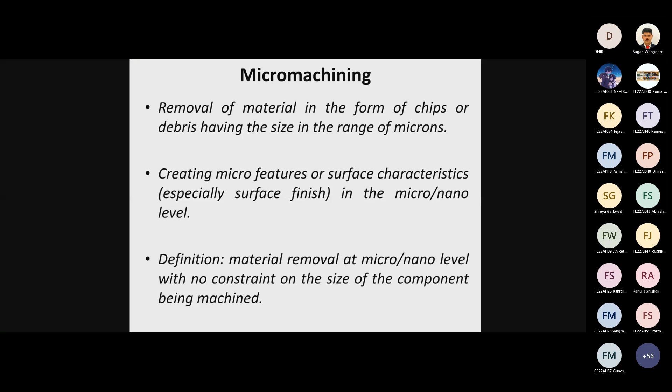Now here you can see what micro machining is: removal of material in the form of chips or debris having size in the range of microns. Whatever chips or material we are removing, its size ranges from 10 microns to 999 microns. That is nothing but micro machining.

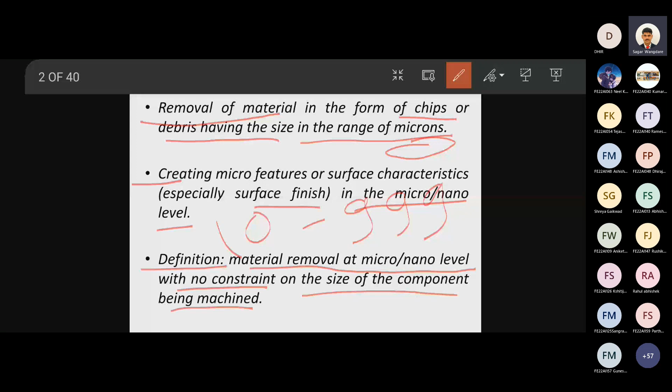Now, creating micro features or surface characteristics, especially surface finish at the micro or nano level, for this micro machining is useful. The definition is: material removal at micro or nano level with no constraint on the size of the component being machined. That is nothing but your micro machining.

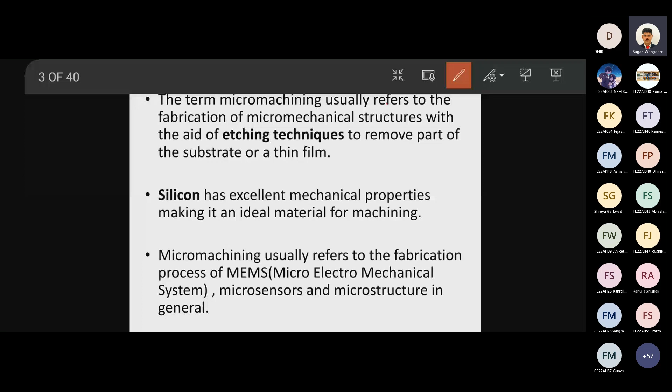The term micro machining usually refers to the fabrication of micromechanical structures with the aid of etching technique. Etching means removing in small particles, that is nothing but your etching.

Etching is used to remove part of the substrate or a thin film. The technique used in micro machining is etching, which means removing the material in small quantities.

Then next point is silicon. Silicon has excellent mechanical properties, making it the ideal material for machining. Because of silicon's material properties, it is used most of the time in micro machining.

Micro machining usually refers to the fabrication process of MEMS, micro electromechanical systems. This micro machining is required for small electronic parts. But machining is a mechanical process, so this mechanical process we use in small electronic parts, that's why it is termed MEMS, micro electromechanical systems.

In that, we have micro sensors and microstructures in general. You might have heard terms like microcontroller and all this, these are also manufactured with the help of micro machining.

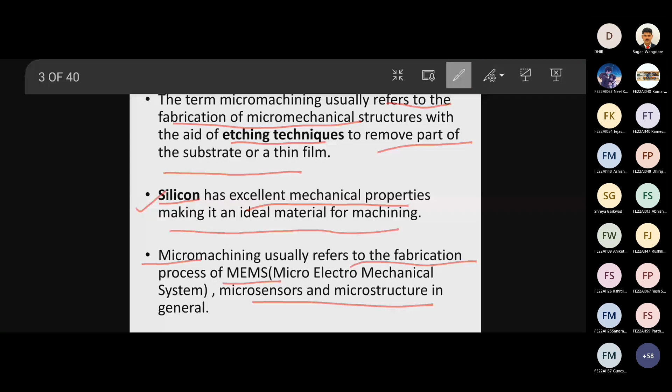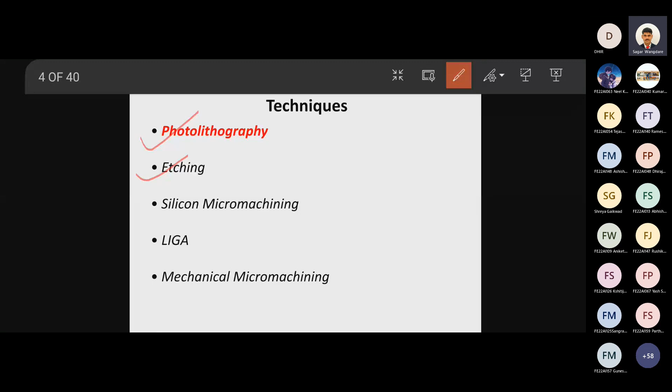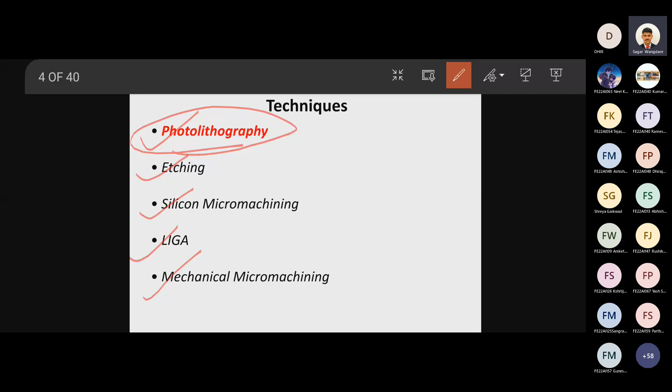Now, these are the different techniques by which we can do micro machining. First is photolithography, photo means light, in this we use light. Etching means removing in small parts. Silicon micro machining, LIGA, mechanical micro machining, these are the various types, out of which we will see the first one and another one, etching.

Here you can see photolithography, this is one type of micro machining. Photo means light, right? Now, how do we use light to remove the material? You can see here, this is your light source.

That light source is allowed to pass through this condenser lens. In this condenser lens, whatever light is coming from the source, that is scattered. Now, because of this condenser lens or glass lens, your light will convert into a straight line.

When your light passes through this mask or reticle, and then whatever light comes out from this reticle, when it passes through the projection lens, your light gets concentrated, right? So here it is concentrated at the foci, which is a little above the surface.

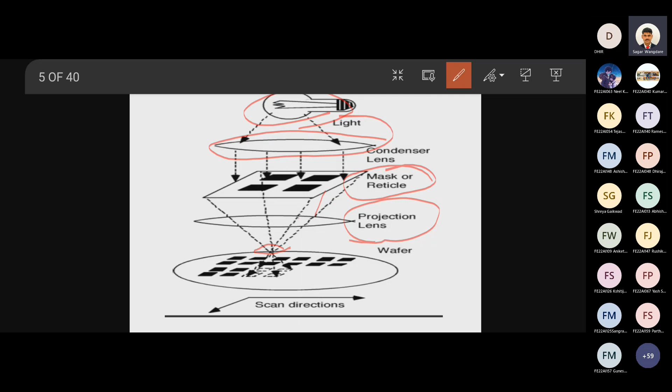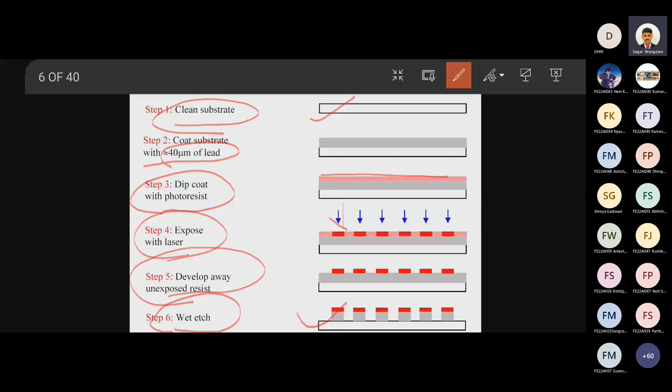Now, photolithography description, you can see here. The wafers are chemically cleaned to remove particulate matter, organic, ionic, and metallic impurities. High-speed centrifugal whirling of silicon wafers, known as spin coating, produces a thin uniform layer of photoresist, a light-sensitive polymer.

on the wafers. Photoresist is exposed to a set of light through a mask, often made of quartz. Wavelength of light ranges from 300 to 500 nanometer for UV rays, and X-ray wavelength is 4 to 50 angstroms. 1 angstrom means 10 raised to minus 10 meter.

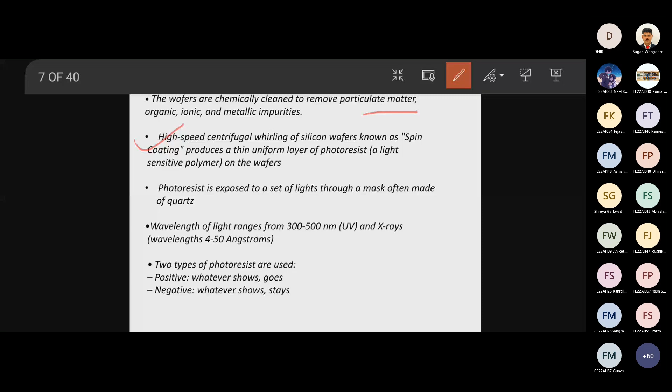Angstrom is the unit of length of the wavelength of the light.

Two types of photoresist are used: positive, where whatever shows goes away, and negative, where whatever shows stays.

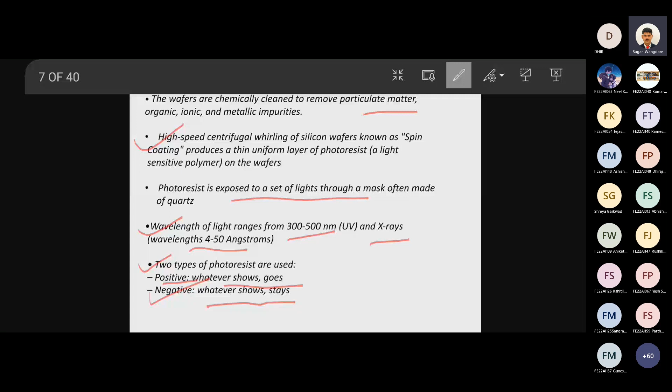You can see here the same thing, negative photoresist and positive photoresist. In negative photoresist, whatever is showing will stay, and in positive, whatever shows will go. And at the last, we get the etched patterns.

Now the next micro machining process is abrasive jet machining. What is abrasive? Abrasive is nothing but small, very hard particles. Now what we do with these hard particles is mix them with air, and force that air to pass through a very small nozzle.

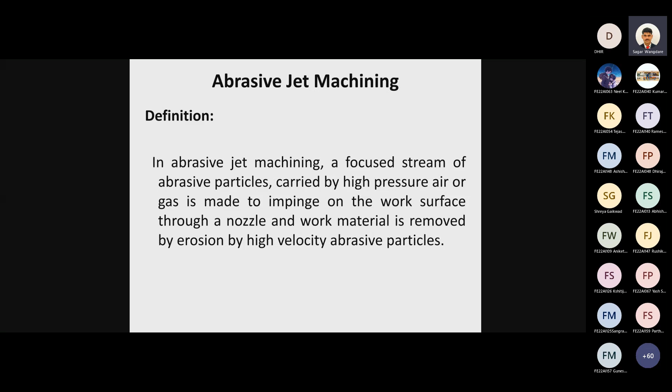When these small abrasives pass through with this air, because of the air pressure, these abrasives also flow with very high speed. When these abrasives fall on any workpiece, they remove material from it. In abrasive jet machining, a focused stream of abrasive particles carried by high pressure air or gas is made to impinge, meaning fall, on the work surface through a nozzle, and work material is removed by erosion due to the high velocity of abrasive particles.

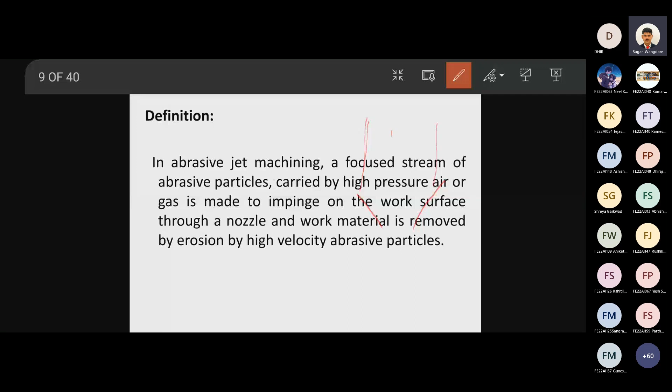Now suppose this is your nozzle. Through this nozzle, high velocity air is flowing, and along with it there are some abrasives. These abrasives are allowed to fall on this workpiece. When these abrasives fall on the workpiece, because of their high velocity, material will be removed from the workpiece. That is how abrasive jet machining works.

Then another method is also there, electron discharge machining. In electron discharge machining, what we do is force electrons to fall through a small nozzle onto the workpiece. The size of an electron is very, very small, right? So because of the fall of electrons at very high speed, it will take a small hole, or material will be removed at a small scale. There are some holes which are in the nanometer or micrometer range, so such holes can be made with the help of micro machining.

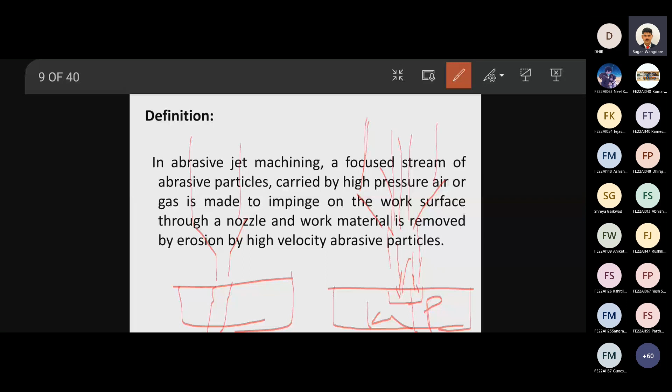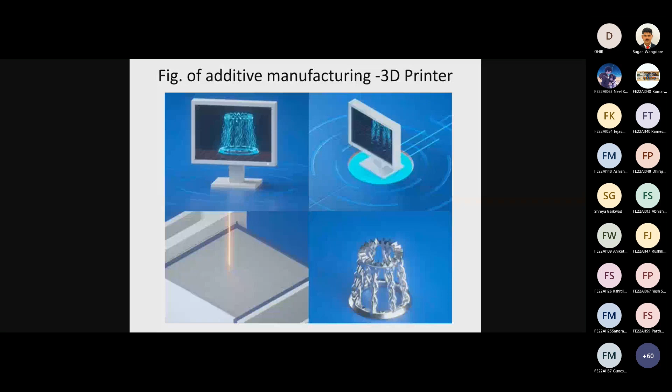Additive manufacturing we have seen yesterday. That is how micro machining works. I hope you understood micro machining.

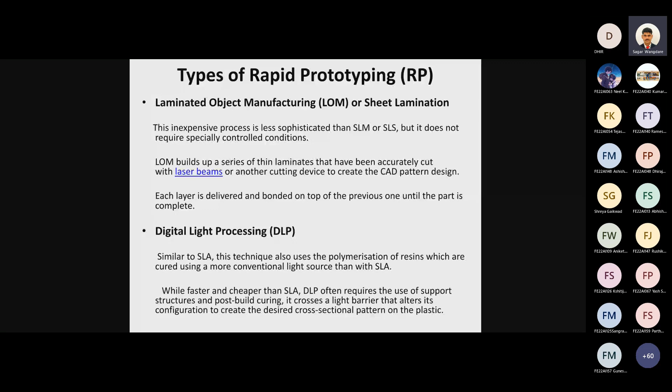Now the next one is the CNC machine. What is meant by CNC? Can anyone tell me the full form of CNC? Computerized, numerically controlled. Yes, CNC means computerized and numerically controlled machine.

Now this CNC machine is the same as a lathe machine only. But what do we do in a lathe machine? We load the tool, load the workpiece, increase or decrease the speed, move the tool - all these operations are carried out by the operator in a lathe machine. An operator is in touch with the machine, so an accident may happen in the machine.

So in a CNC machine, there is only a lathe machine, but that lathe machine is operated with the help of a computer. A small computer is there in the CNC machine, so we operate that CNC machine with the help of a computer. That's why it is called a computerized and numerically controlled machine.

Okay. Now in this, the spindle speed, when that spindle or this jaw will hold the workpiece, at what speed the workpiece will rotate, which tool will be selected, movement of the tool, everything is controlled by a centralized computer or microcontroller or machine control unit. हम उसको machine control unit बोलते हैं, right? So that will control all the things.

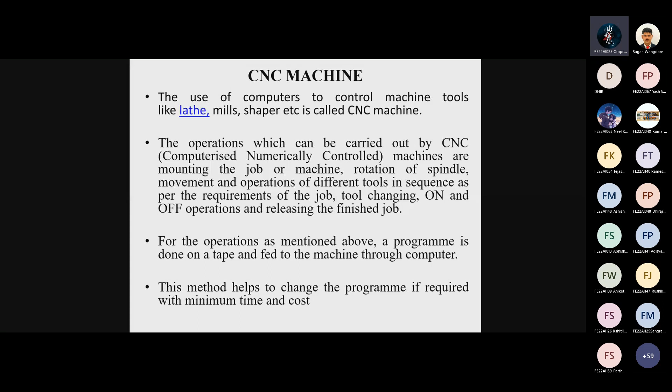Now you can see here the use of computers to control machine tools like lathe, milling, shaper, etc. is called a CNC machine. So CNC machine में सिर्फ lathe नहीं होती: lathe machine, milling machine, drilling machine, shaper machine. Whatever operations we conventionally carry out on all these machines will be carried out on CNC, but with the help of programming, right?

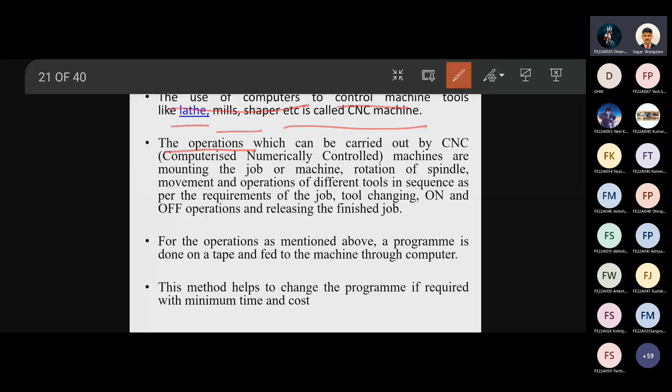Now, the operations which can be carried out by CNC machines are mounting the job on the machine, rotation of spindle.

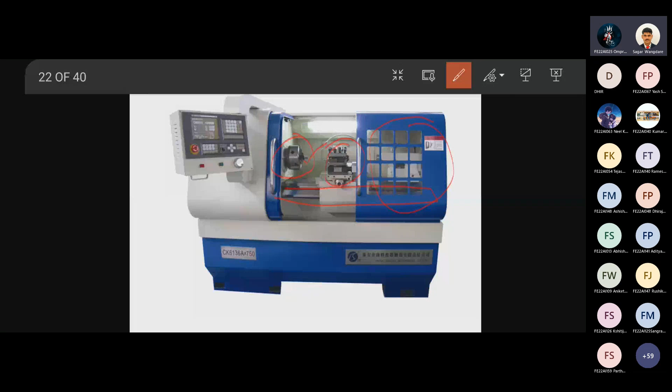Once your job is inserted there, you just close the door and start the machine. So the machine will automatically operate.

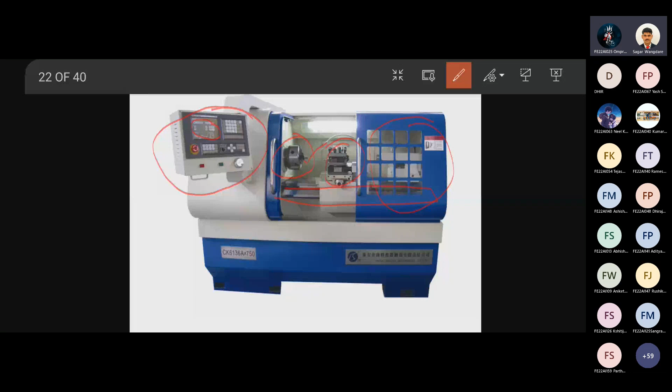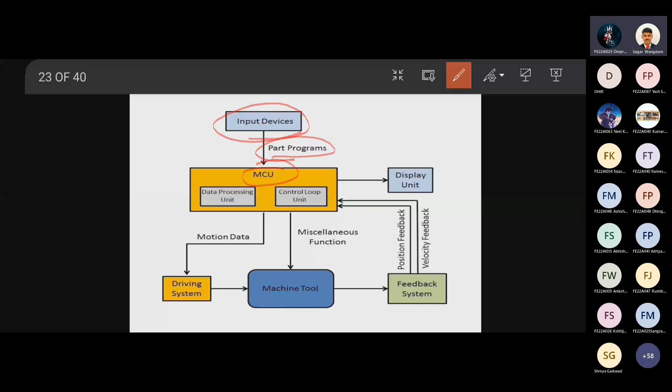Okay. Now in machine control unit there is a data processing unit, that is your microprocessor, and control loop unit, that is your microcontroller. Okay. And one display unit is also there. So whatever operation is going on, that will be displayed, or whatever the instructions are required from the keyboard, that instructions will be displayed, and accordingly your operator will press the buttons.

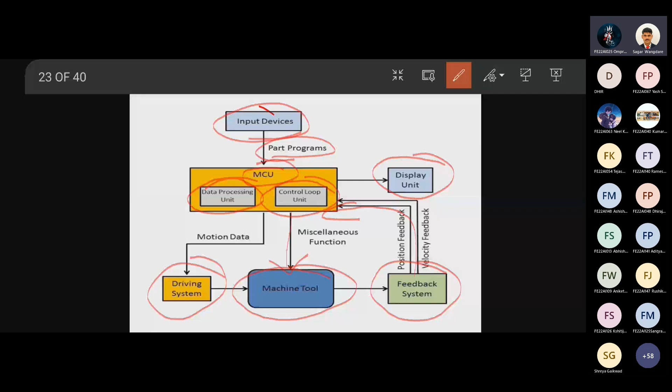In machine control unit there is a microprocessor and microcontroller. So it will process all the information taken, right, and accordingly it will give the instructions to the actuators, that is nothing but your driving system, electric motor.

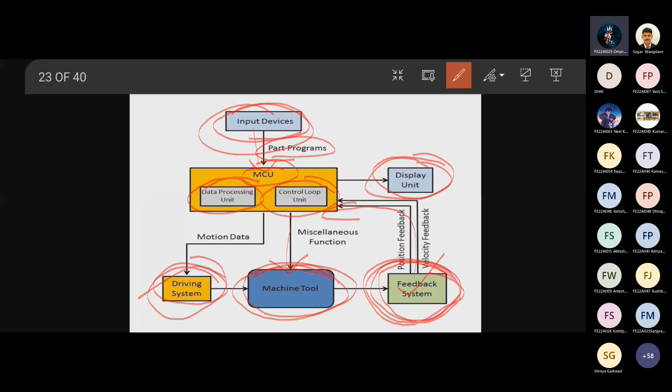Okay, you can see here main parts of the first input devices. These are the devices which are used to input part program in the CNC machine. There are three commonly used input devices, and these are punch tape reader, magnetic tape reader, and computer via RS-232C communication. These are the olden devices by which we were taking the programs or data in tape reader and all this. Nowadays it can be taken with the help of your pen drive also.

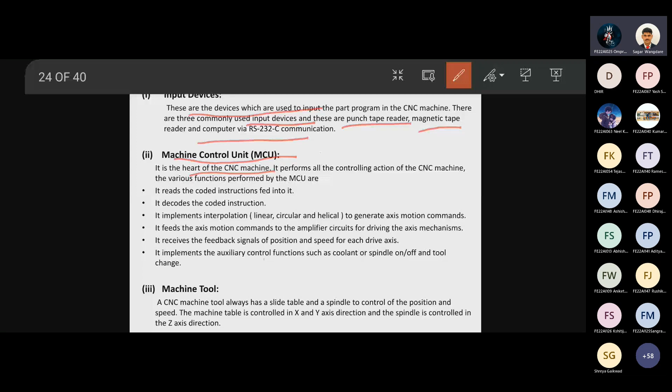Okay, machine control unit. It is the heart of the CNC. It performs all the controlling action of the CNC machine. Of the various functions performed by the MCU: it reads coded instructions fed into it. It decodes coded instructions. It implements interpolation, that is linear, circular, and helical, to generate axis motion commands, right? So inside this also there is mathematics.

So it feeds the axis motion commands to the amplifier circuits for driving the axis mechanisms. Okay, it receives the feedback signal of position and speed for each drive axis. It implements the auxiliary control functions such as coolant or spindle on off and tool. Why is coolant needed?

Because during some of the operations lots of heat is generated. So to avoid overheating of the tool and overheating of the workpiece, coolant is used. Okay, next is the machine tool.

Now in machine tool, a CNC machine tool always has a slide table and a spindle to control the position and speed.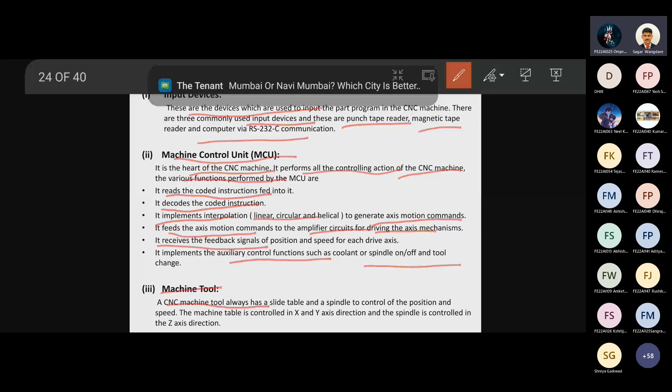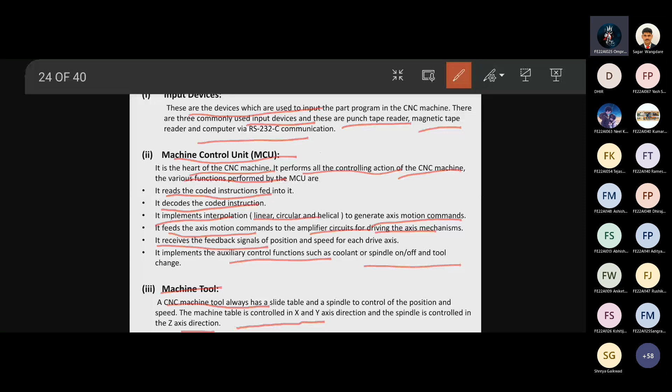Okay, so the machine table is controlled in x and y axis direction, and the spindle is controlled in z axis direction. Yes. Then driving system. The driving system of CNC machine consists of amplifier circuit, drive motors, and ball lead screw. Okay, the MCU feeds the signal, that is position and speed, of each axis to the amplifier circuit. The control signals are then augmented, increased to actuate the drive motors, and the actuated drive motors rotate the ball lead screw to position the machine table.

Feedback system. This system consists of transducers that act like sensors. It is also called a measuring system. Feedback system is nothing but your feedback.

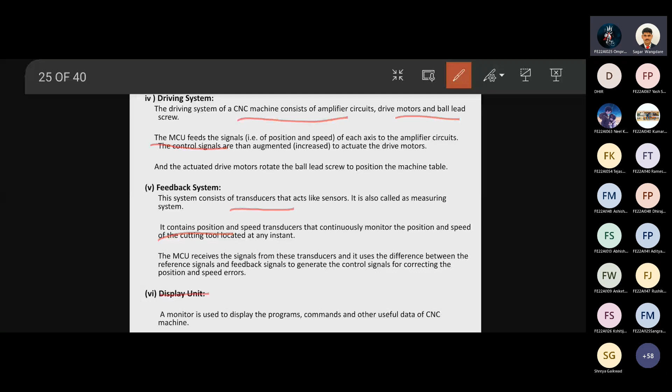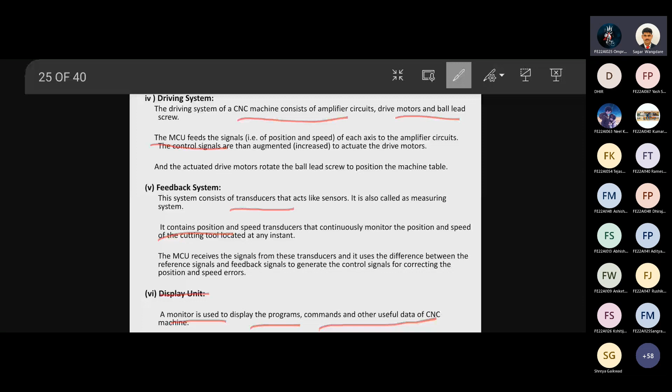Display unit. In display unit, a monitor is used to display the programs, commands, and other useful data of CNC machine. Yes. How CNC is working, we have already explained. It is taking instruction from the input, then it is processing and giving command to the driving system and machine tools, and the feedback system is used to check whether everything is working as per the given instructions or not, right? That is your working of CNC machine.

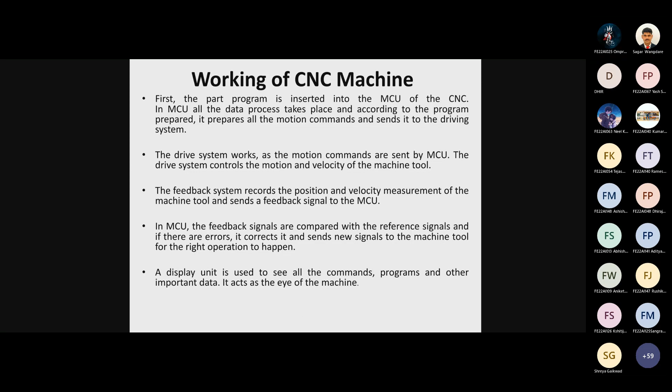Yes. Now advantages of CNC machines. Already we have discussed the advantages. Now here we will see the advantages one by one. First, it can produce jobs with higher accuracy and precision than any other manual machine.

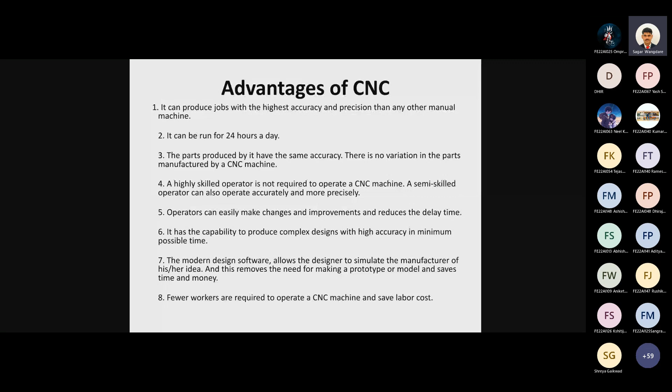Okay. Now second, it can run for 24 hours a day. Once the program is fed, it can keep on working continuously. Third, the parts produced by it have the same accuracy. There is no variation in the parts manufactured by the CNC machine.

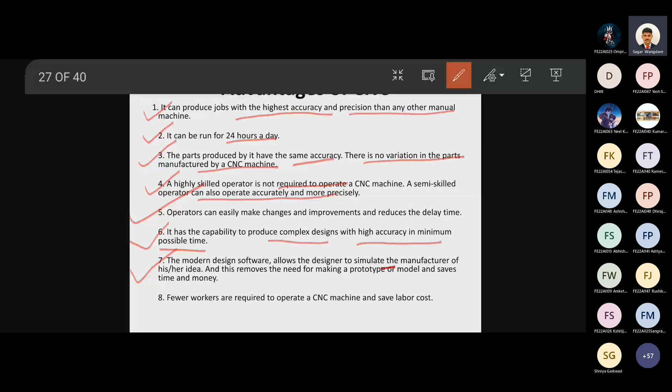Or a semi-skilled operator can also operate accurately and more precisely. Then next advantage, operators can easily make changes and improvements, and it reduces the delay time. Okay. Then it has the capability to produce complex designs with high accuracy in minimum possible time. Okay. The modern design software allows the designer to simulate the manufacture of his or her idea, and this removes the need of making a prototype or model and saves time and money. Few workers are required to operate a CNC machine, which saves labor cost. So fewer workers are required, so it saves the labor cost.

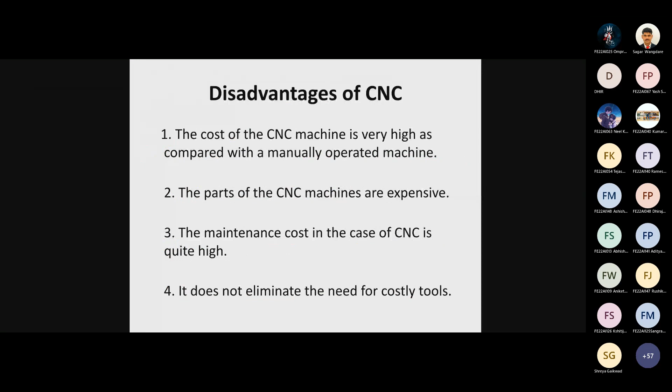Now disadvantages. What are the disadvantages? First, the cost of the CNC machine is very high as compared to manually operated machine.

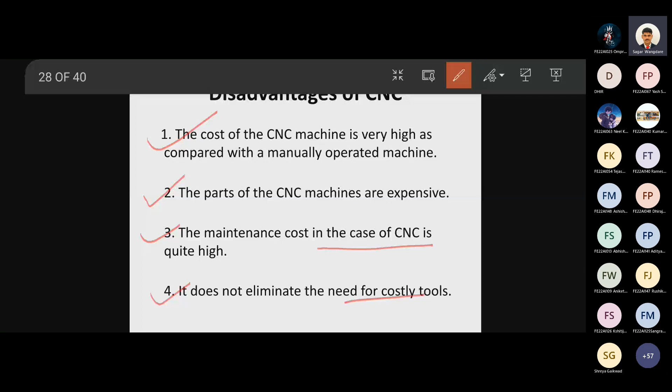The parts of the CNC machines are expensive. The maintenance cost is also high, and it does not eliminate the need of costly tools. So cost is the disadvantage.

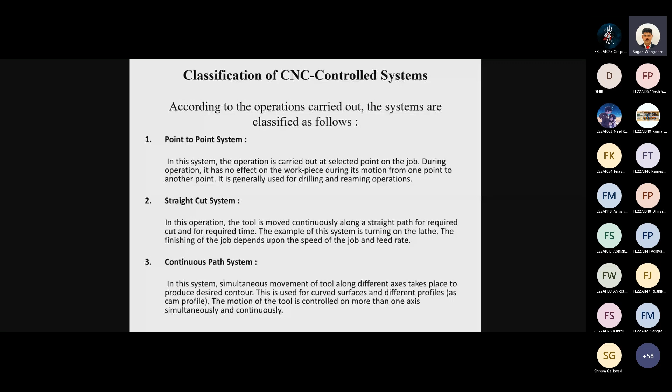Now there are classification of CNC controlled systems. According to the operations carried out, the systems are classified as, first is the point to point system. Now in point to point system what do we do? It moves from point to point.

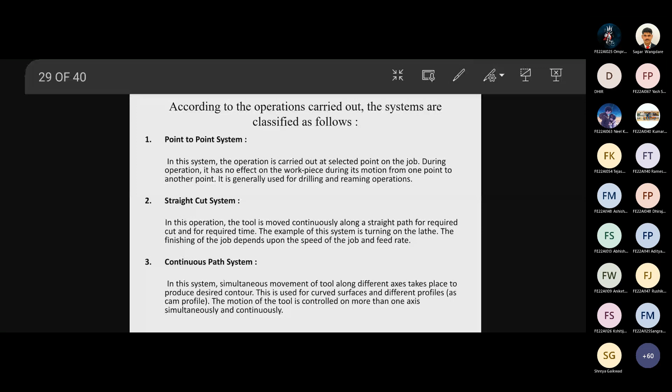So it is just checking point to point. It first takes this point, then this point, then this point. So how is this taking this point? This will be considered as origin, that is 0, 0. With respect to origin, what is the location of this? Suppose 5,3. Then it will go to 5,3 and will take the hole.

Then with respect to origin, what is its location? 10,6. So the tool will go there, take the hole, then come up, then move there as per their location. That is your point to point system. Okay.

Then next one is the straight cut system. In straight cut system, your machine is taking the straight cut. In the coming slide I will show you straight cut. And in continuous path system, it is moving continuously, maybe like this in any given contour shapes. Okay.

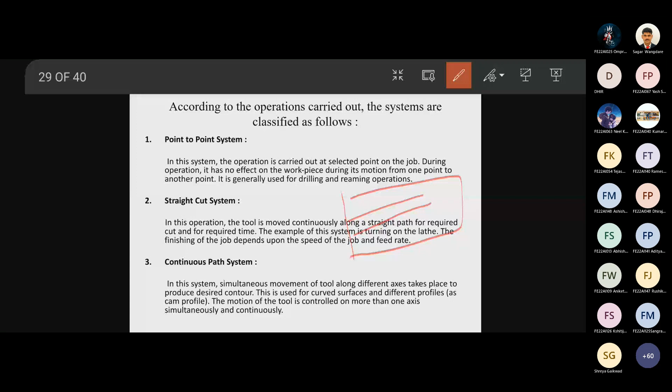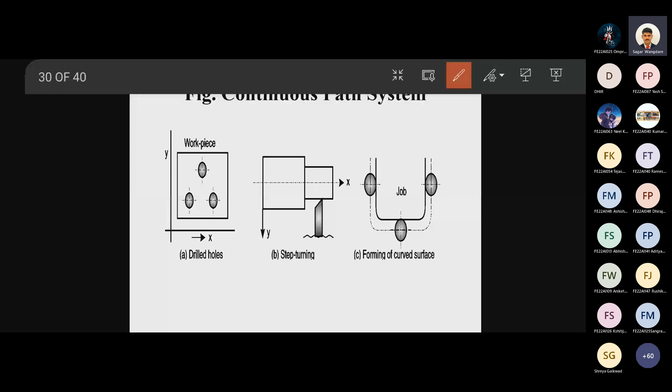Okay, you can see here. First one is your point to point system, that is used to take the holes at different locations. The second one is the straight line cutting. This is straight line cut, and this is your continuous movement. Okay.

Yes. Now in CNC program, the most commonly used codes when programming CNC machine tools are G codes, which are also called preparatory functions, and M codes, which are called miscellaneous functions.

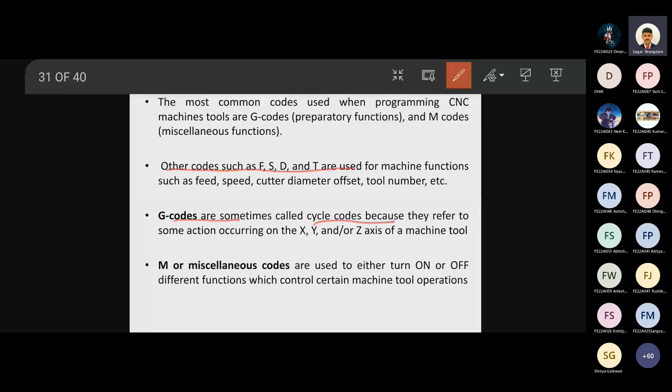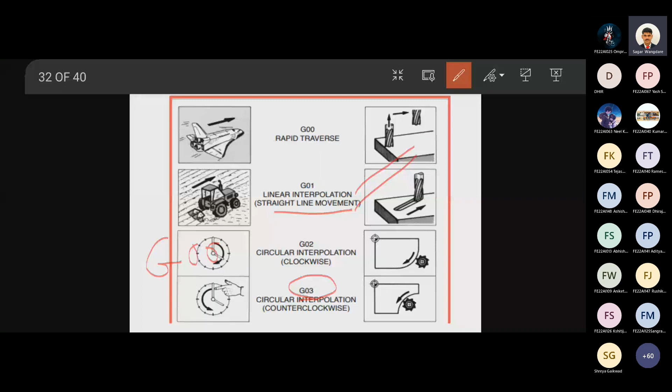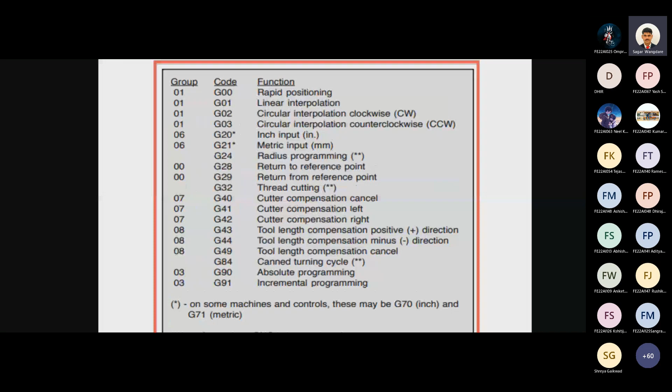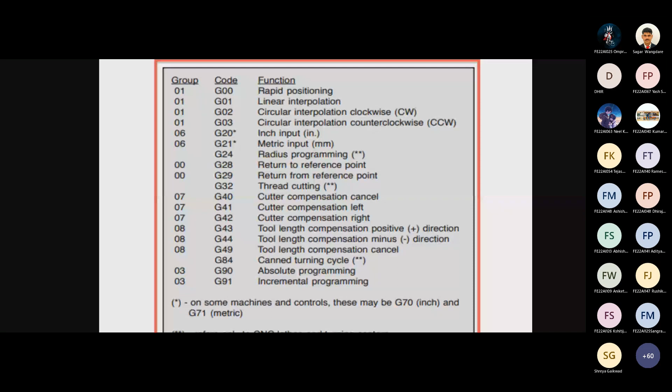Similarly, other G codes are also there. These are the G codes that you can refer. G00 to G91, various codes are there, out of which important codes are given here. You can go through all these important codes. Okay, you can see here.

What is G00? Rapid positioning. G01 linear interpolation. G02 circular interpolation clockwise. G03 circular interpolation anti-clockwise. G20 inch input. G21 metric input. G24 radius programming. G28 return to reference point. G29 return from reference point. G32 thread cutting. G40 cutter compensation cancel.

G41 cutter compensation left. G42 cutter compensation right. G43 tool length compensation positive direction. G44 tool length compensation negative direction. G49 tool length compensation cancel. G84 canned turning cycles. G90 absolute programming and G91 incremental programming.

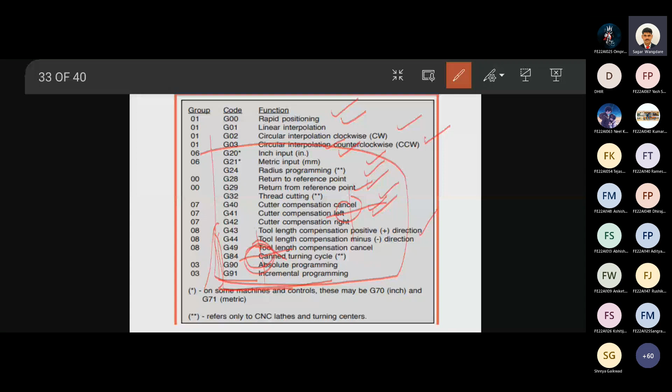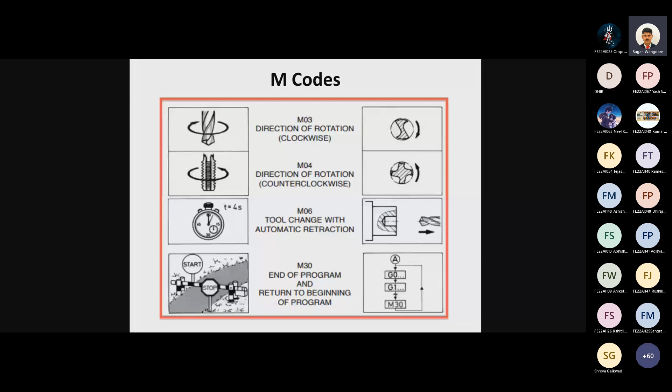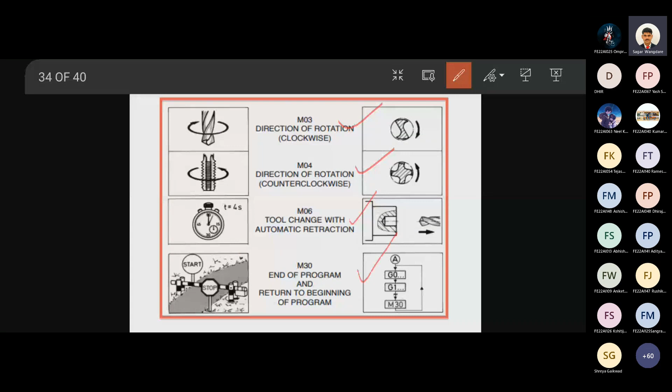Yes. Now there are M codes, miscellaneous codes. Some M codes are given here. You can see here, direction of rotation of tool clockwise M03, M04 direction of rotation counterclockwise, tool change with automatic retraction, M30 end of program and return to beginning of the program. These are the various M codes. You can go through this.

You may think, sir, whether we need to remember all the codes or not. Whatever you are able to remember, you can remember. Okay.

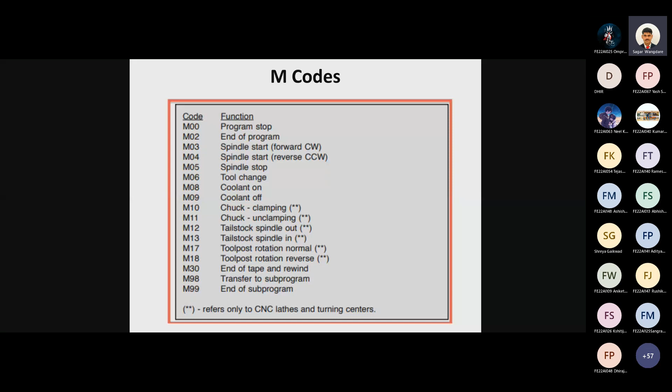Now the last point is Internet of Things. You all must have heard of Internet of Things. What is Internet of Things? Can anyone tell me? I would like to know what you know about IoT, Internet of Things.

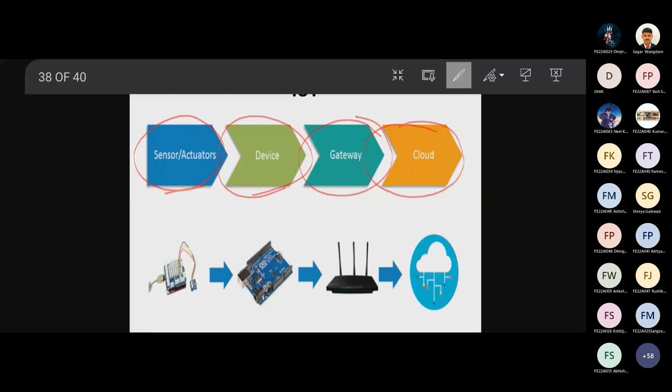You can see here the basics of IoT: cloud, network, sensors, and your analog world. That could be your temperature, pressure, position, weight, speed, flow, humidity, sound, light. That is your IoT.